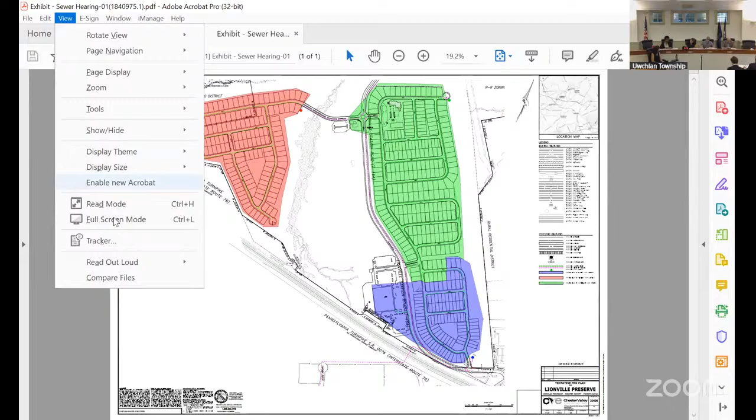Yes, I would submit Mr. Hudson as an expert in sewer engineering. Does the board have any questions about Mr. Hudson's credentials? No.

Do anyone with party status have any questions for Mr. Hudson, just as to his credentials? The company name is Evans Mill Environmental. So we'll accept Mr. Hudson as an expert in sewer. Thank you.

Did Chester Valley Engineers prepare, well first of all, let me take a step back. Is the proposal here to have the subdivision, and by the subdivision I mean the homes and the natatorium that we've been talking about, is the proposal here to have that connected to public sewer? Yes. And did Chester Valley Engineers prepare a sewer exhibit plan dated July 9, 2026, a copy of which is Exhibit A26 in the board's package?

And I think that's the exhibit that's up on the screen to my left, is it not? It's a little faint in the lower left-hand corner, but it is. All right, beginning with sheet 1 of that sewer exhibit plan. Is that sheet 1 on the screen? All right, this shows the property.

It's in different colored areas, which represents different phases of the development. I'm not going to get into the phasing of the development with you, but what I am going to ask you is, using that plan, if you can, and do we have a pointer here? Because that might help. I'm going to ask you to educate the board, the public, and actually myself as to where the various sewer improvements are on that plan.

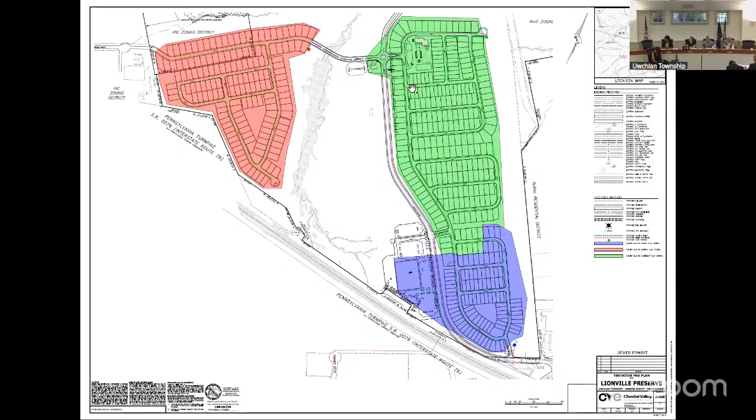I'm going to have to go take a closer look at the plan. I'm not quite sure that's the correct plan. You talking about the plan that shows the routing of the force main? Hang on for a second, maybe I'm mistaken. I think it was right, the next one right after.

Yeah, okay, it's Exhibit A2, or Sheet 2 rather, of Exhibit A26. Is that it? That's better, that's the one I was expecting to see there. Yeah, can you blow it up? Can we blow it up more than that?

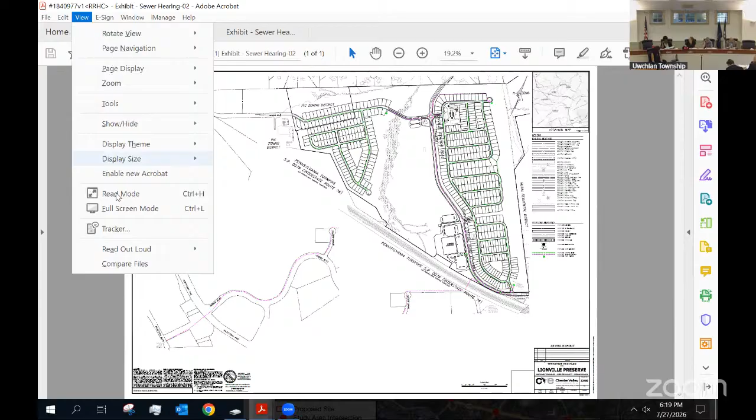Well, the project will connect to the public sewer by constructing a force main, which is a pressurized pipeline that would extend from the south end of the development as shown, and it would follow a routing along the right-of-way of Lionville Station Road and cross... from the south end of the development, it would be pumped along the right-of-way of Lionville Station Road.

And it would cross the turnpike and then run along a section of private property, the Portman Holdings property, then follow Tanner Drive, and then be routed along Sheree Boulevard, cross Route 100, continue on Sheree Boulevard, and then connect to an existing township manhole located at the intersection of Eagleview and Sheree Boulevards.

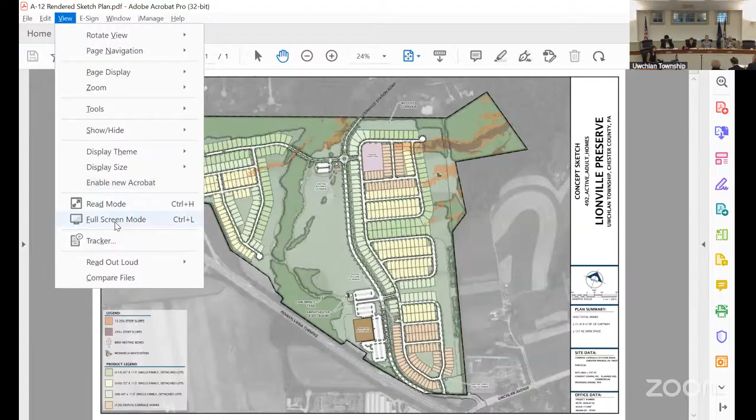It's really a guess at this point. It probably takes another year of getting the plan in recordable fashion, a year of getting infrastructure in place, a year to get the first house completed, and then you still have the other 49. So it could very well be 3 years before the first house, in the best case scenario, would be ready.

Yes, I do. Richard Stratton. Rick, could you state your business address and your place of employment for the record? 112 Moores Road, Suite 200, Malvern, Pennsylvania, 19355. I work with Chester Valley Engineers.

And you are the civil engineer responsible for putting together the tentative plan submission for this project? Yes, I am. And Exhibit A27 is a copy of your CV? Yes. You are a professional engineer licensed in the Commonwealth? I am. And have you appeared before municipal bodies in and around Chester County and been accepted as an expert witness in civil engineering? Yes.

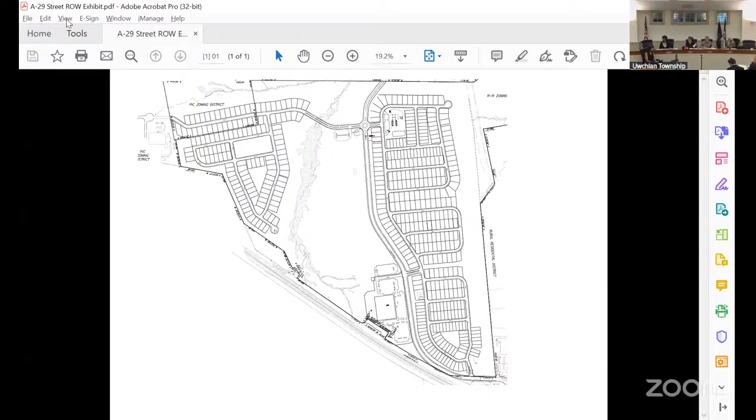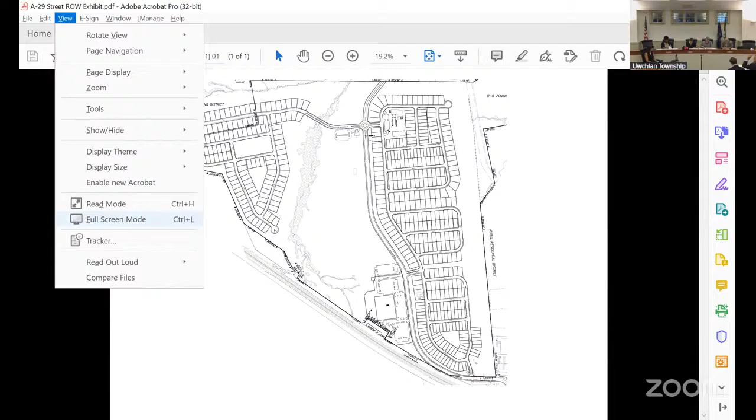I'm going to refer you to Exhibit A29, which gets into more of the particulars of what you just testified to. It's called a right-of-way exhibit plan for Lionville Preserve, which I believe you prepared, correct? Yes. Okay, we'll pull that up here in just a second. This shows in a little better detail what you just testified to.

Let's talk about Lionville Station Road and what the right-of-way ordinance, or the draft zoning ordinance, requires for the newly constructed portion of Lionville Station Road. The right-of-way required here is 60 feet, the required width. And that's what you're showing, right? Yes, but not for the entire length of Lionville Station Road.

Correct. There is a portion to the north where we are keeping the existing right-of-way, north of the proposed roundabout, and that would stay at its current width. The reasoning is a couple of things: one is to discourage through traffic from using that northern road to continue and exit the site, and also to minimize impervious area. Leaving the roundabout, the pavement will transition back to existing gradually.

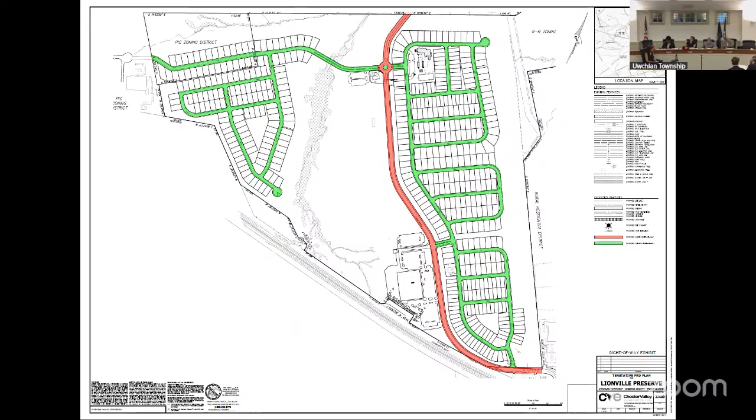Okay, let's move off of the roads. Let's get into open space, recreation, and pedestrian connectivity.

The draft ordinance would require that 35% of the PRD's gross tract area must be set aside as common open space. Does this application meet that requirement? Yeah, the proposal exceeds the requirement—approximately 127.5 acres of the property will be preserved as open space, which is 50.24%, higher than the 35% required.

Now, of that required open space, 50% must be passive recreation area available for public use. Will this tentative plan meet that ordinance requirement? Yes, it will. And that's going to be refined based on the review letters received from the township civil engineer—the exact location and boundaries of that open space will continue to be refined should the plan be approved, going from tentative to final, correct?

Yes. Right now, is it safe to say that the principal activity in the passive open space is a walking trail? Correct. There are walking trails on the eastern side of the site, and a proposed walking trail on the central part of the site, weaving in and around the wetlands and the stream area. And there are no ball fields or soccer fields proposed within the open space area, correct? Correct, no athletic fields proposed.

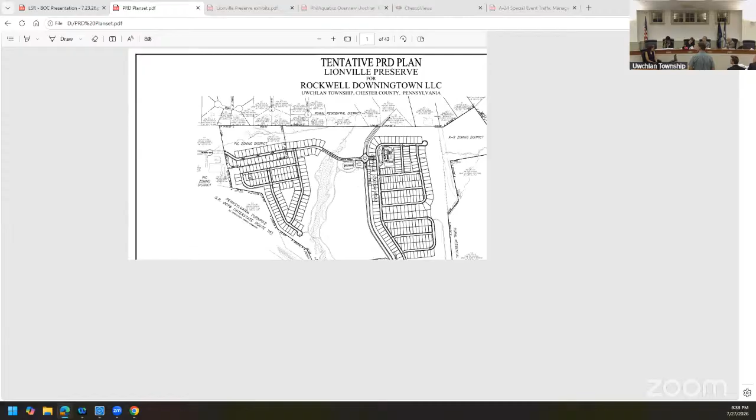Is there a document that shows before and after of the woods and shows the math of how it arrives at 30%? I downloaded the whole zip file but couldn't find it. On the existing conditions plan in the tentative PRD set, we do show a hatched area of existing woods to be removed. On screen it might show up as a gray area, and that's how we calculated the percent removal. It is hard to see on this exhibit, but we can provide a clear PDF you can look at.

Okay, thank you. Because it appeared you showed the two at the top, but halfway down the eastern border there's another section, maybe 10 or 12 acres, almost a perfect rectangle, that comes out to the third row of housing, and that will all be ripped out as well. I want to make sure we're accounting for everything. I also don't think it's necessary for the township to allow more than 25% of the woods to be taken out.

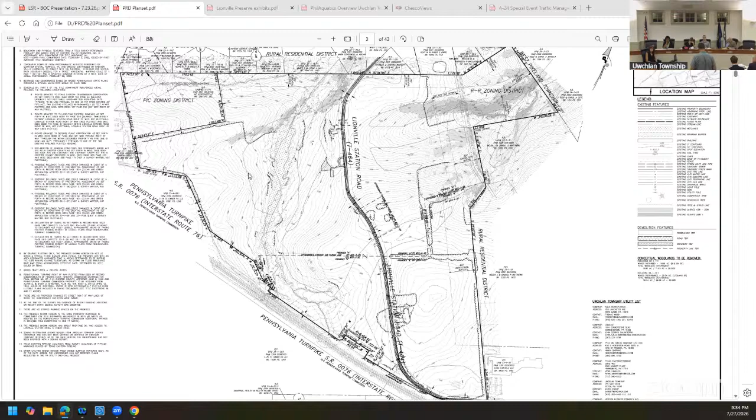Up at the upper right-hand corner, just below my property, just below the cul-de-sac there - Greg, I appreciate you coming out and meeting with me and walking the spot, but I just don't see why it's necessary to take out that large section of woods east of the cul-de-sac for stormwater management. I believe it's required to provide multiple alternatives to taking out woods, and I would really like to see an alternative to this.

At the end of the cul-de-sac, the stormwater management is essentially to manage the stormwater from the cul-de-sac there. To the south we have steep slopes, and in a previous iteration, prior to meeting with you and your neighbors, we had the stormwater management up against your property line. We brought that down and also brought it under the cul-de-sac to minimize tree disturbance, and we increased the setback from the back of our property line to your property line by another 25 feet for additional buffer.